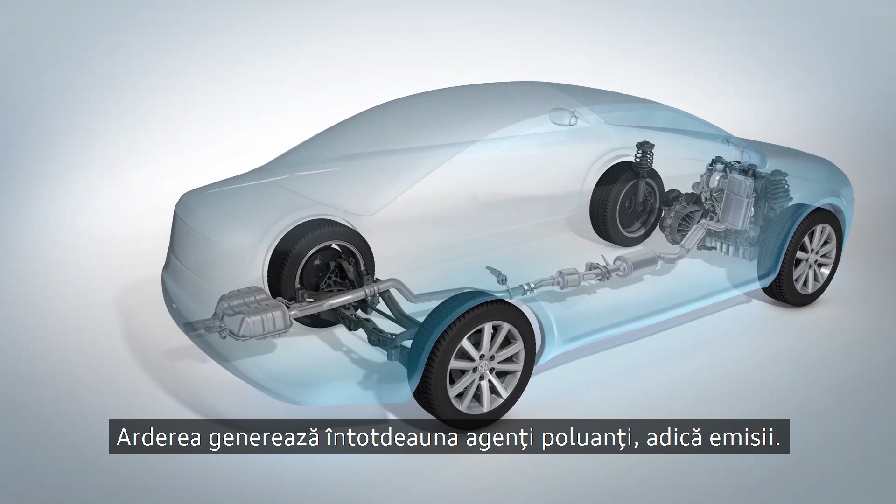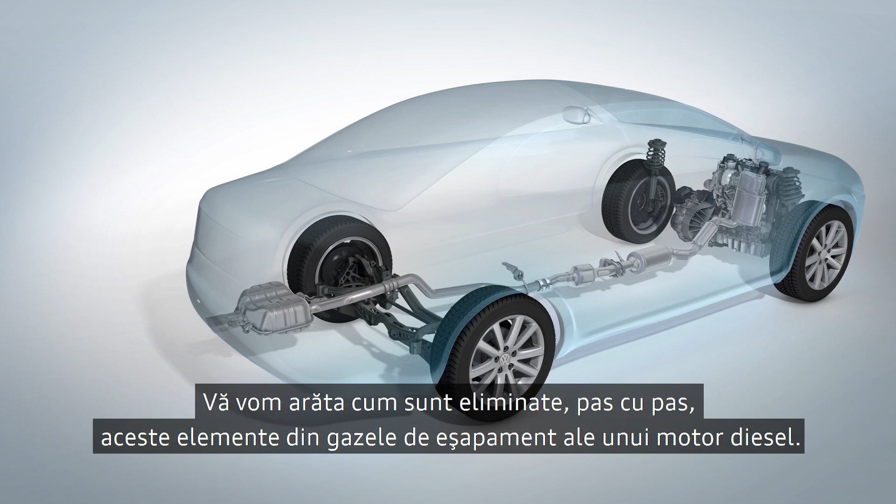A vehicle with a petrol or diesel engine burns fuel. Combustion always creates pollutants, the emissions. Legal limits apply to a number of components of the emissions. We will show you how these elements are removed from a diesel engine's exhaust gas, step by step.

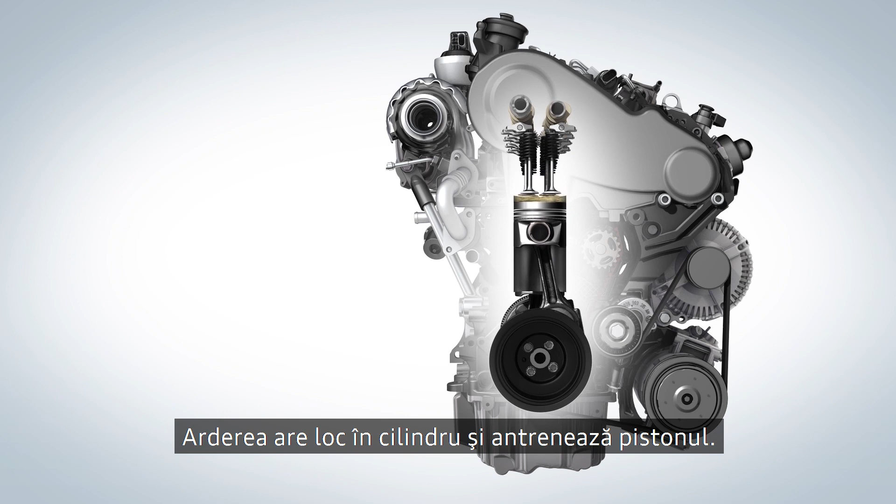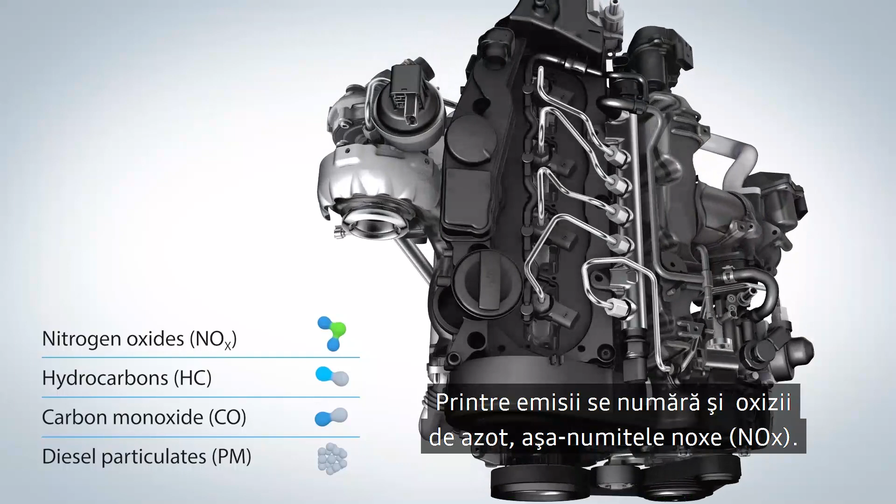The combustion takes place in the cylinder and drives the piston. Here, the emissions are generated. The nitrogen oxides, the so-called NOx, are part of the emissions. They are already minimized inside the engine. This is exactly what exhaust gas recirculation does, by feeding part of the exhaust gas back into the cylinder. This reduces the combustion temperature, giving rise to far fewer NOx.

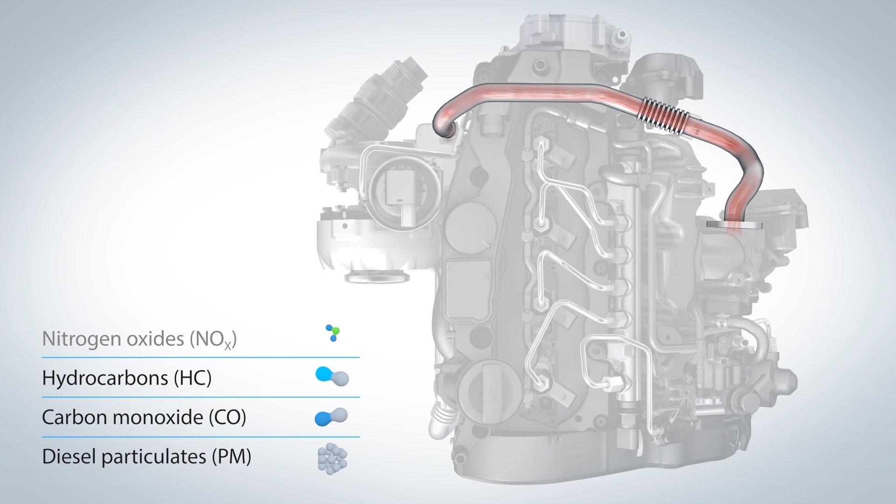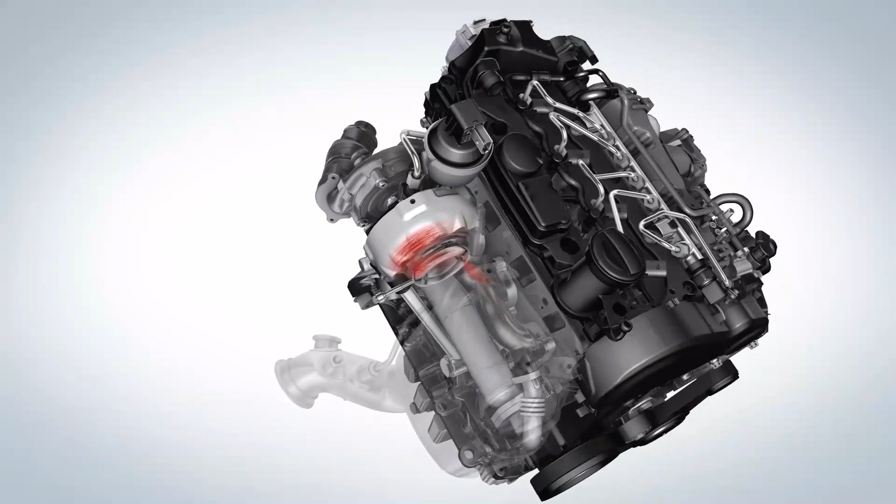After the exhaust gas has left the combustion chamber, it drives the turbocharger and moves on to the exhaust gas aftertreatment. In this compact unit, the exhaust gas encounters the oxidation catalytic converter. This converts the carbon monoxide and hydrocarbons left over after the combustion process. The products: CO2 and water.

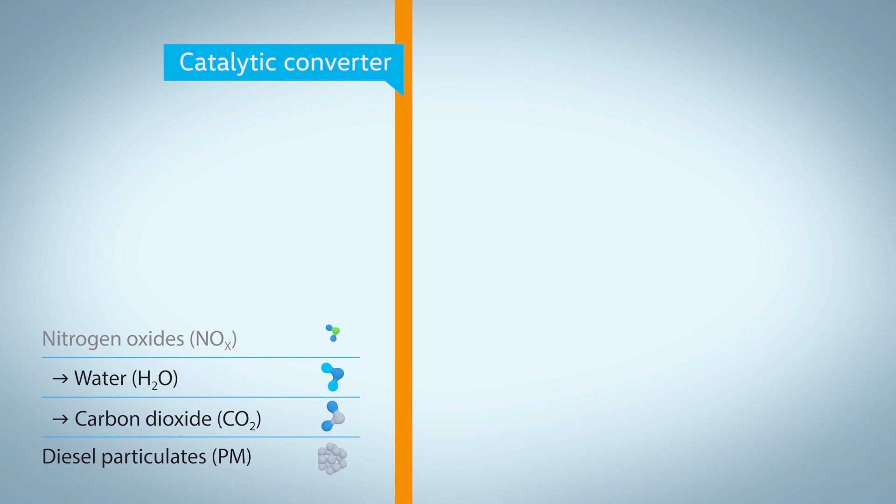In a next step, the exhaust gas reaches the diesel particulate filter, which eliminates the soot.

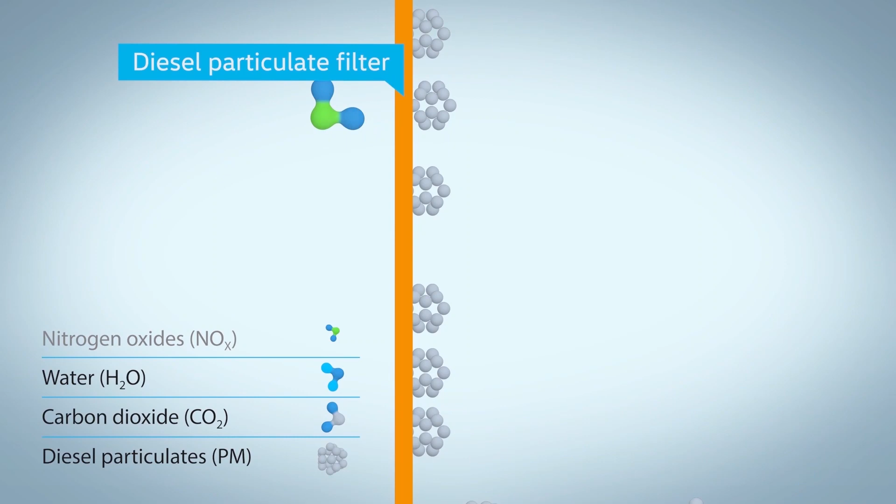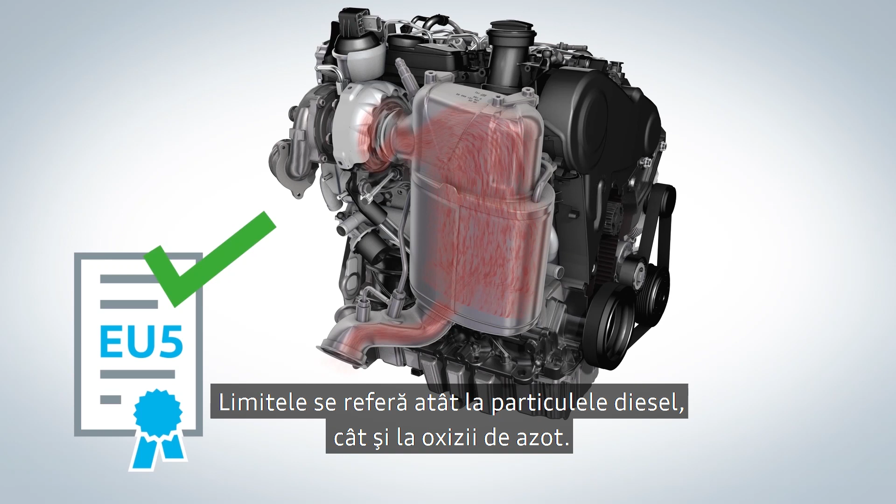The process described here reliably fulfills the exhaust limits of the former Euro 5 standard in Europe. The limits regulate both the diesel particulates and the nitrogen oxides. However, reducing them both results in a technical conflict, since with the diesel engine, a reduction of the particulate emissions automatically leads to increasing NOx emissions, and vice versa.

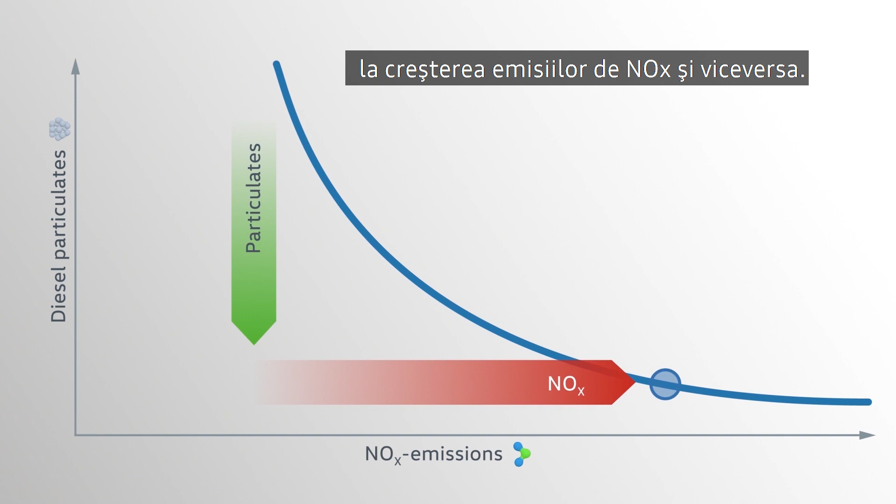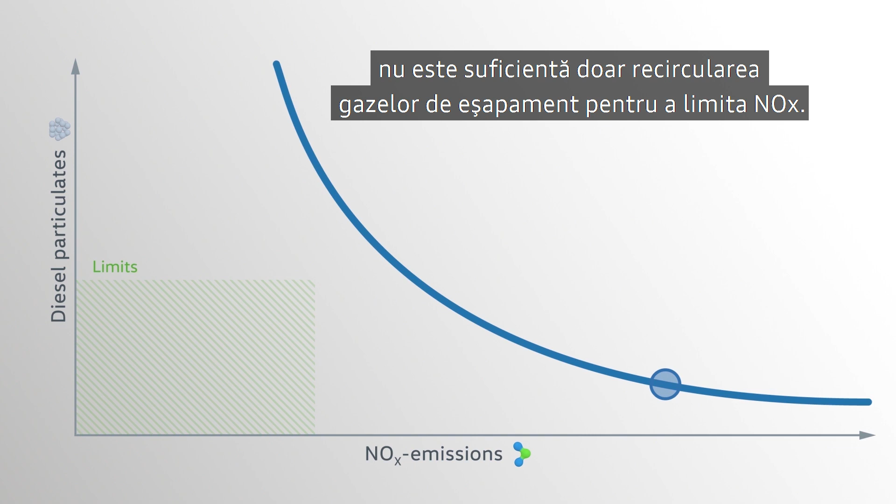Therefore, to comply with stricter NOx limits such as Tier 2 Bin 5 in North America, exhaust gas recirculation alone is insufficient to limit the NOx. The NOx have to be reduced actively.

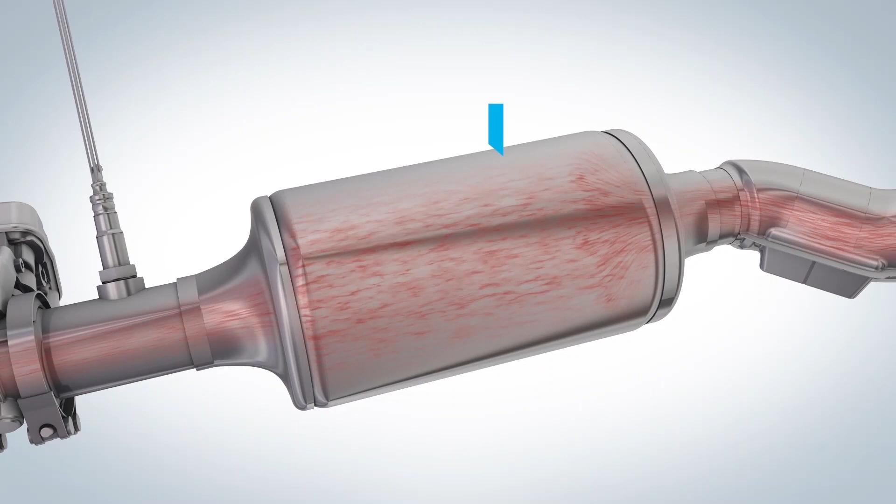There are two technologies for this exhaust gas aftertreatment. One of them is the NOx storage catalytic converter, which stores the nitrogen oxides. When it is discharged, it releases CO2 and nitrogen, as it makes up 78% of our natural atmosphere.

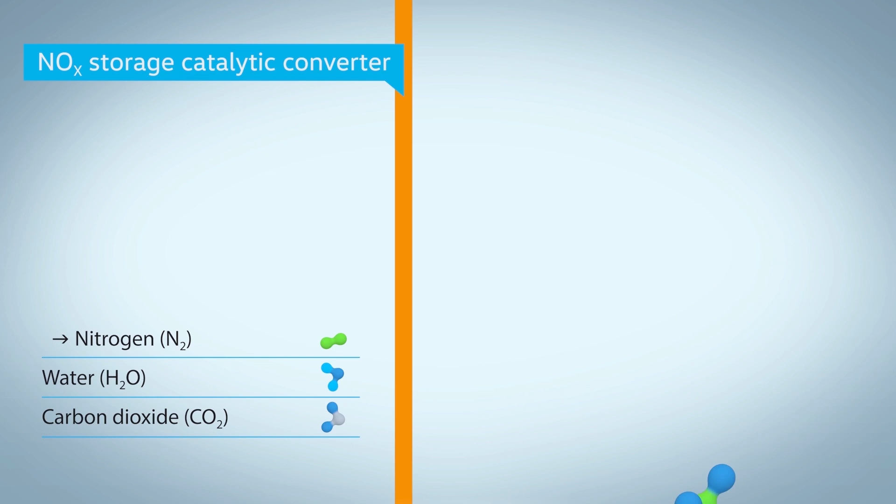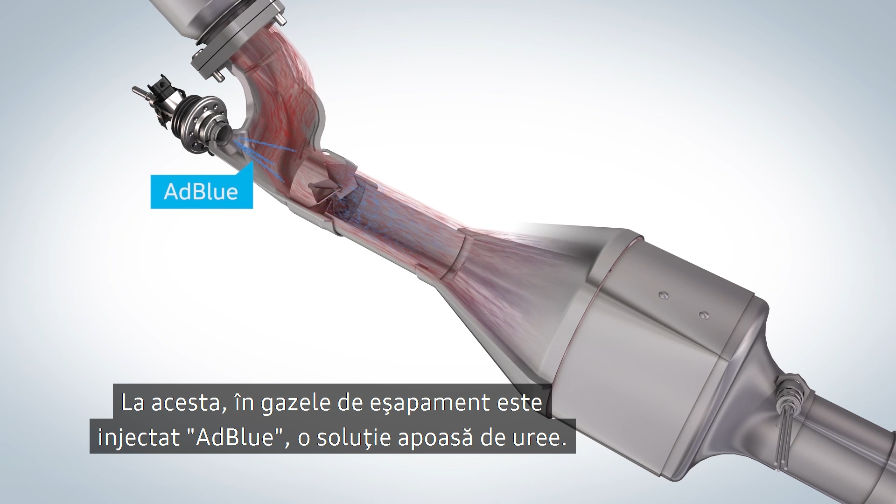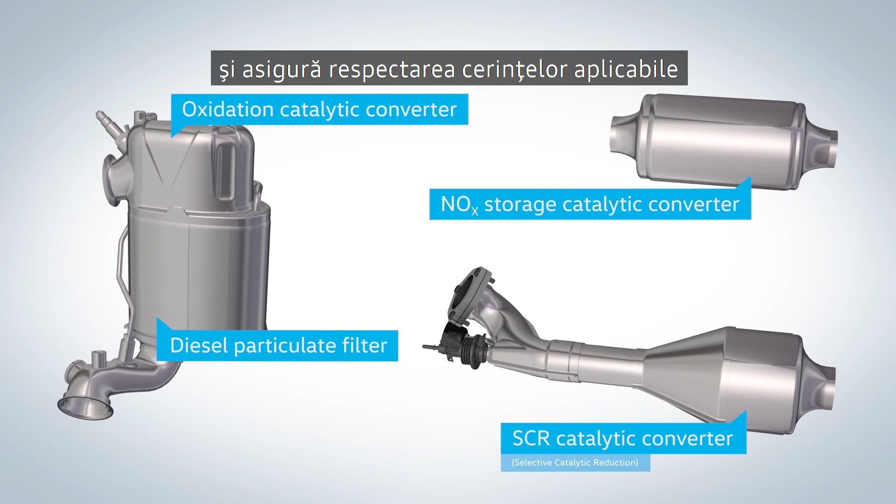Especially in larger vehicles, another technology is used, the SCR system. Here, AdBlue, a water-based urea solution, is injected into the exhaust gas. After its conversion, water and again nitrogen are generated in the SCR catalytic converter. These technologies enable an effective elimination of diesel emissions and ensure compliance with the requirements on the markets worldwide.

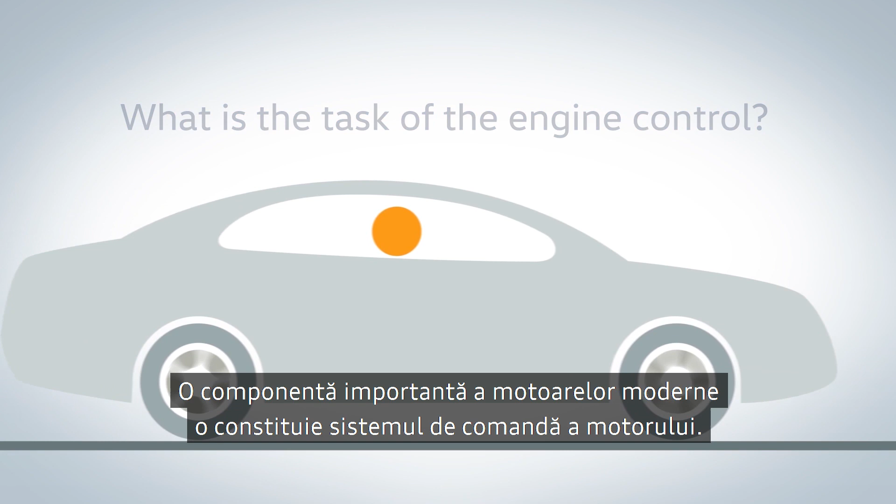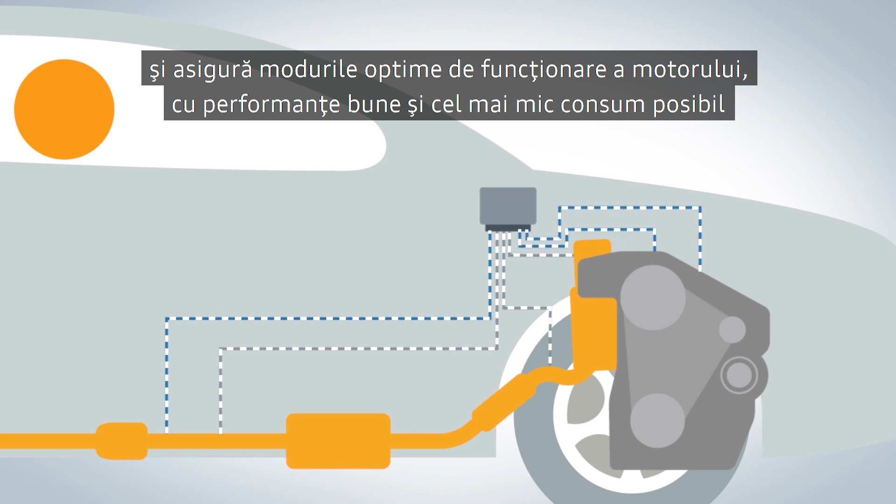An important part of a modern engine is the engine control. Its complex software processes the signals of many sensors in the vehicle and ensures that the cars offer good performance profiles with the lowest possible consumption, and comply with the required exhaust standards at the same time.

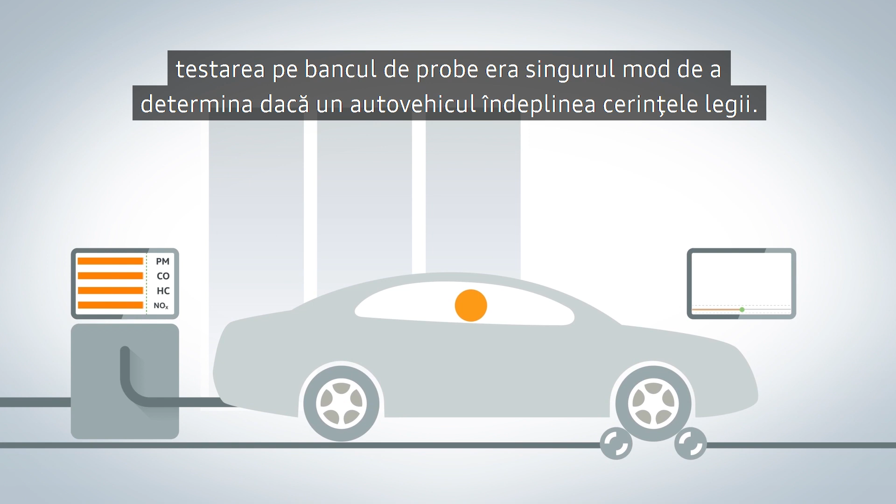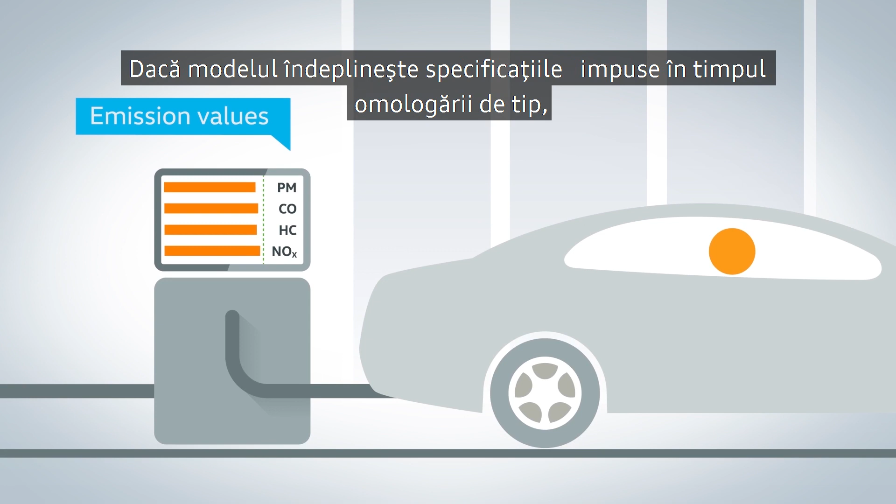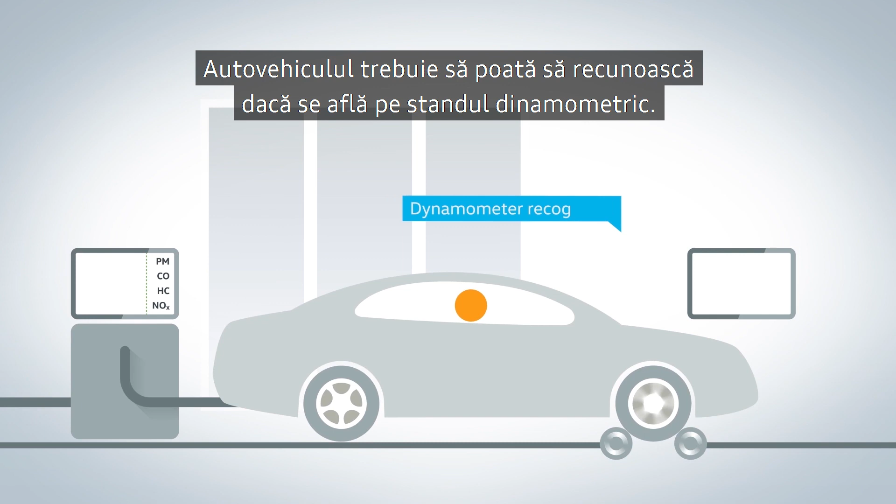Up until September 2017, testing on the test bench was the only way to determine whether a vehicle fulfilled the legal requirements. Here, the vehicle runs with a defined speed curve while the exhaust gas values are being measured. If the model fulfills the required specifications during its type approval, then every vehicle in the series is certified for this emission standard. A vehicle needs to recognize that it stands on the dynamometer, otherwise its ABS would block the drive wheels, for example.

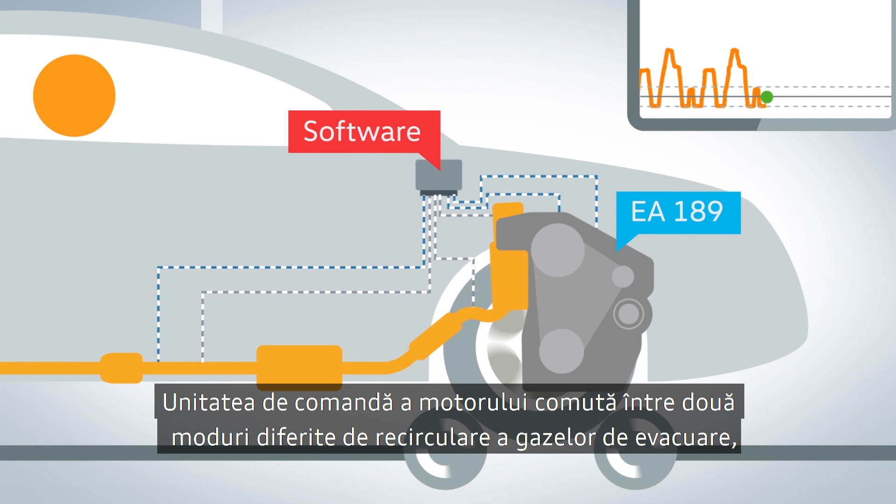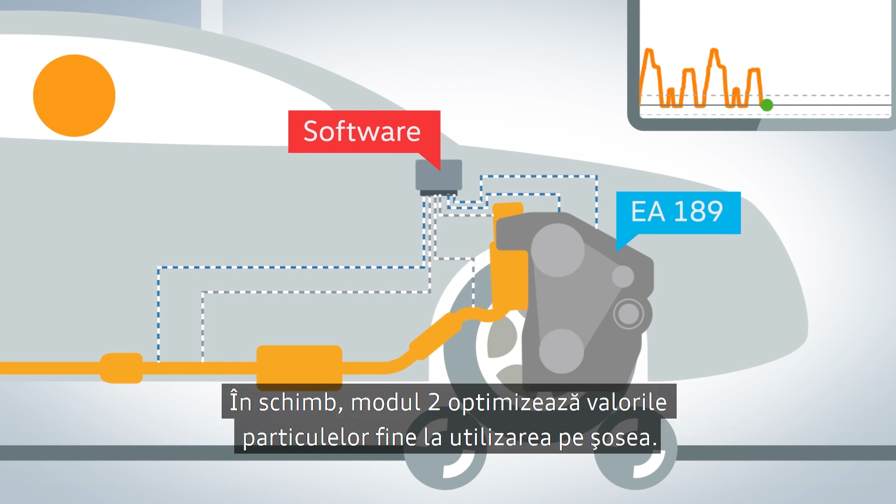Software was used in the vehicles fitted with EA189 diesel engines that can detect the driving curve used in official testing. The engine control unit switches between two different modes of exhaust gas recirculation based on the driving curve detected. Mode 1 optimizes NOx values under test conditions. In contrast, Mode 2 optimizes fine particle values in use on the road.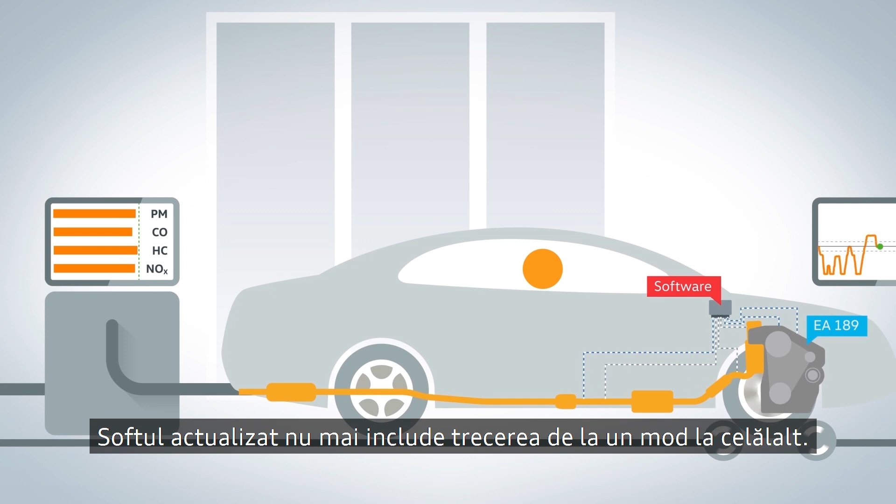There is compliance with threshold limits during the testing cycle. The software update no longer includes the switch.

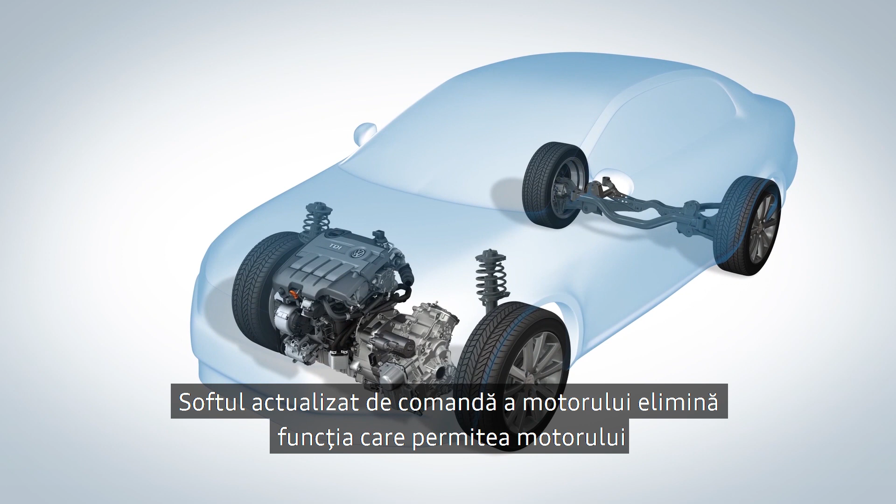We have developed technical measures. The updated engine control software eliminates the switching function that enabled the engine to switch to a particulate-optimized or NOx-optimized mode. These differ for EA189 engines in Europe, depending on the engine type.

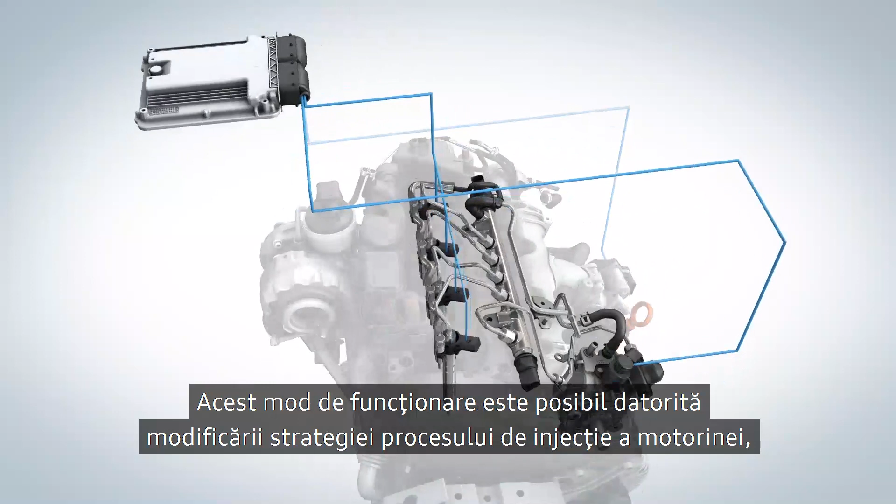All engines get a software update. The adapted software ensures that the combustion is always carried out in a NOx-optimized mode. This is ensured by a modified strategy of the diesel injection and a slightly increased pressure in the injection system at partial load. In addition, the exhaust gas recirculation rate is optimally adjusted, which also ensures that nitrogen oxide test limits continue to be met.

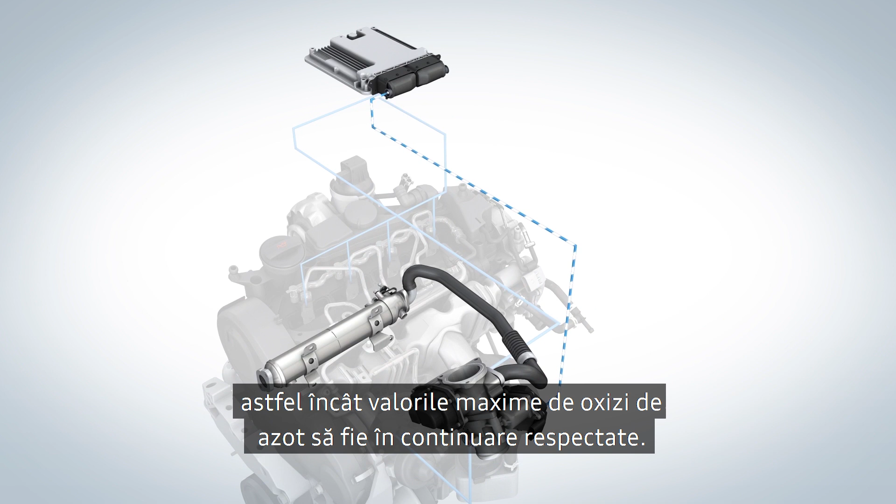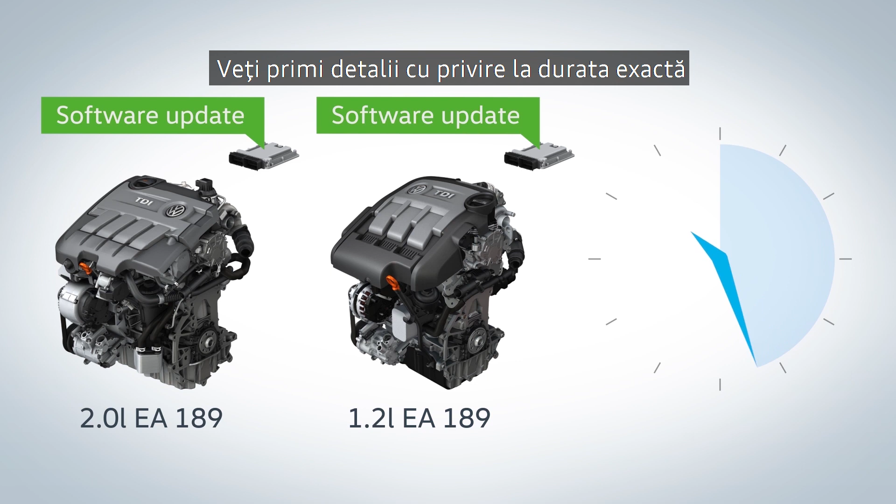The installation of the updated software for the 2.0 and 1.2-liter engines will take about 30 minutes. More specific details on timing will be confirmed to you when booking the vehicle in.

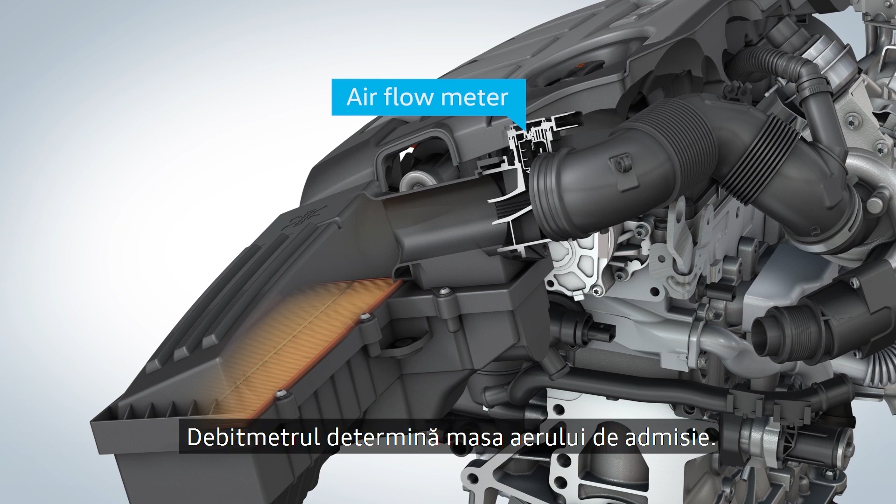For the 1.6-liter engines, the flow towards the airflow meter is additionally improved. The airflow meter determines the mass of the intake air. With this, the engine control doses the fuel quantity and regulates the exhaust gas recirculation rate.

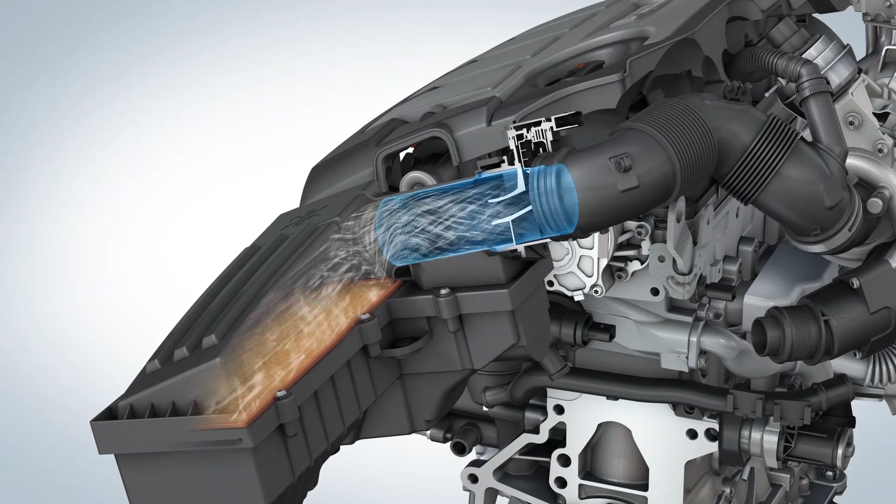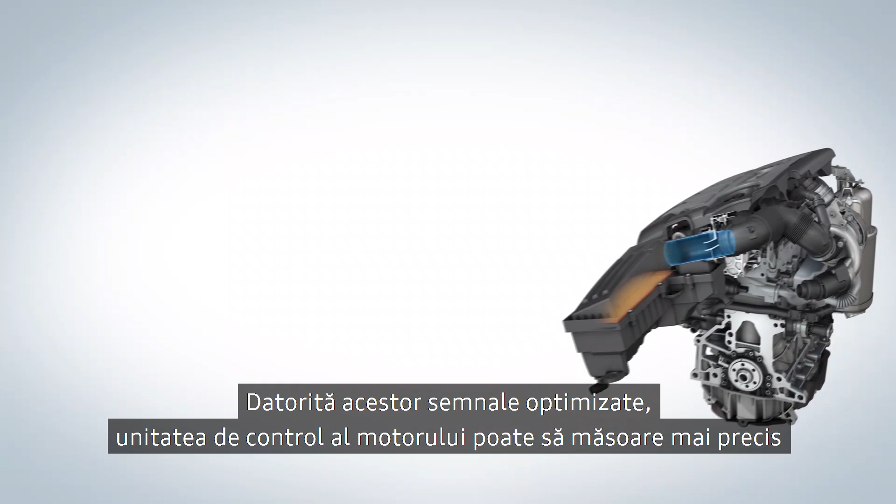The flow straightener is set into the air intake. Its grid calms the flowing air in front of the sensor, which delivers improved signals as a result. With these improved signals, the engine control can more accurately measure the mass of the intake air, and this ensures a more accurate control of the combustion.

This refitting will take approximately 1 hour. The refitting measures are currently adapted to each engine and each affected vehicle type.

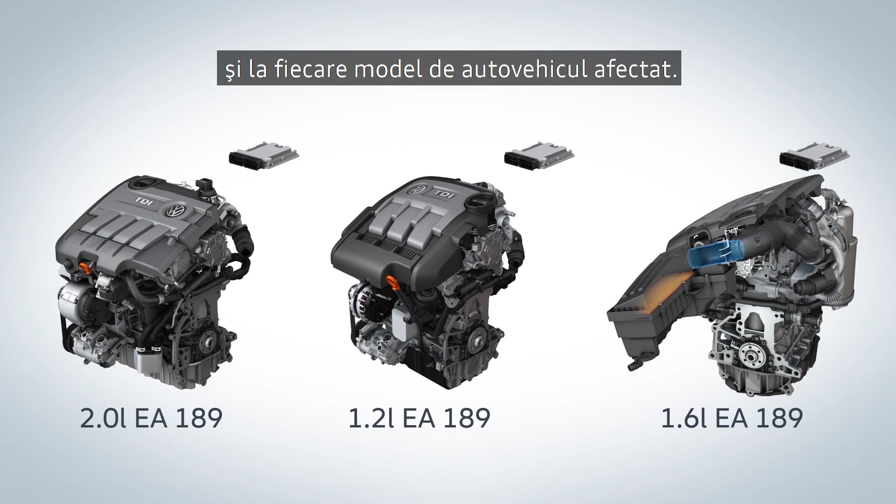All vehicles with EA189 engine type are technically safe and ready to use. The refitting process started in January 2016. We have written to our customers to inform them of the issue, and the technical measures have been installed in more than 5 million vehicles across Europe. Find more information at Volkswagen.com.

Since 2016, Volkswagen has been refitting the vehicles that are affected by the diesel issue. How does the process work for you as our customers?

Since the beginning of 2016, owners of the affected vehicles have been receiving letters from Volkswagen. We received your addresses from the responsible authorities. The letter describes the process for your specific vehicle model.

The refitting process is taking place successively, and all owners have received a second letter throughout the year. Only with this letter do we ask you, in good time, to arrange an appointment with an authorized Volkswagen business partner of your choice. If you wish to be informed about the further process meanwhile, please visit our website.

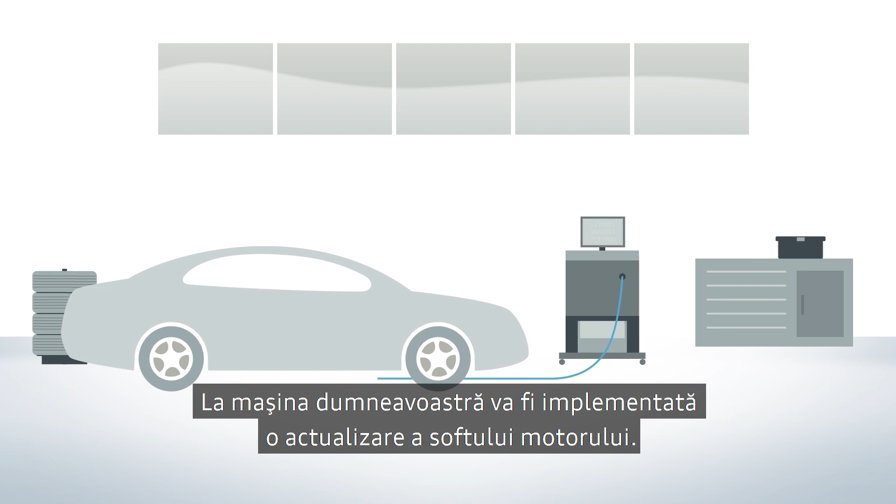The refitting in a Volkswagen workshop of your choice will take approximately between 30 and 60 minutes, depending on engine and measure. Your car will receive an update of the engine software. The 1.6-liter engine additionally gets a component, while you can enjoy a coffee in the lounge.

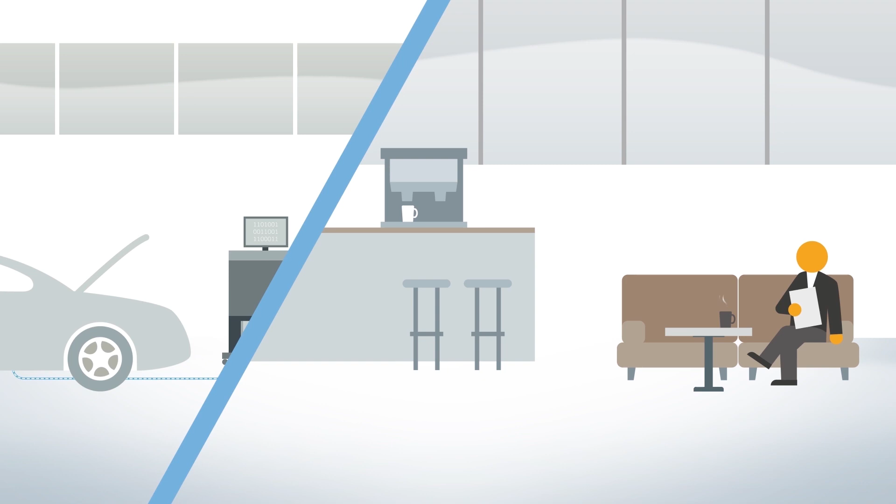The implemented measure is documented by making an entry in the service book and placing a sticker in the spare wheel well. This refitting is, of course, free of charge for you. Find more information at Volkswagen.com.